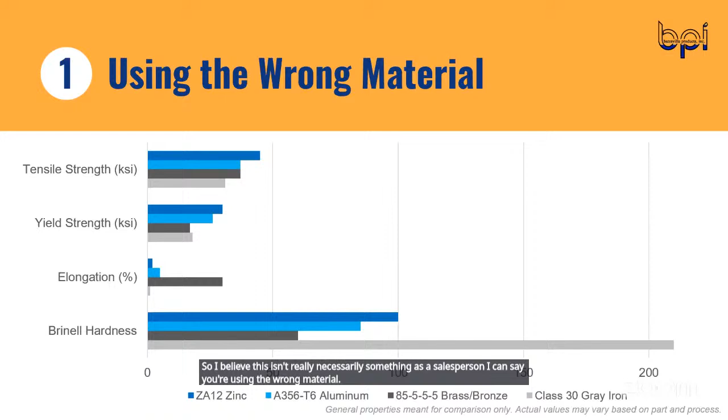Using the wrong material. So what does that mean to you, Rachel? What do you come across and what do you see? I believe this isn't really something a salesperson can say, 'you're using the wrong material' — it's definitely an engineering side where you have to do your research on the product you're utilizing, understanding what's important about the metal and your end use, so you know what you're getting out of your product. Choosing the metal will also determine the process you're going to manufacture with.

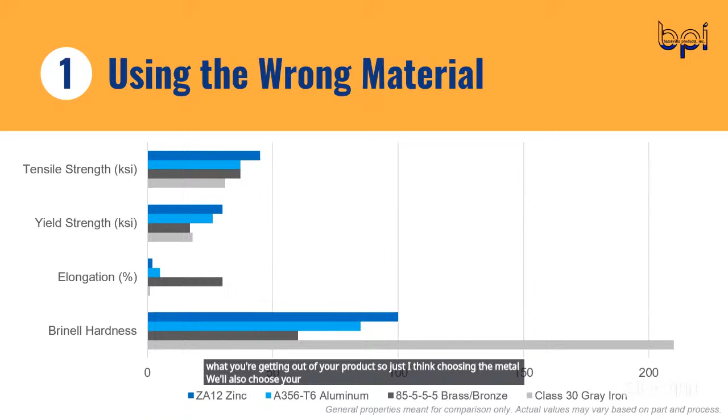So if you're looking for something lightweight but durable, aluminum is a great way to go. We cast A356, ZA12, and ZA5 at our facility. You can see those in blue on the screen, and you can see how they compare to some of the other main materials used in the industry.

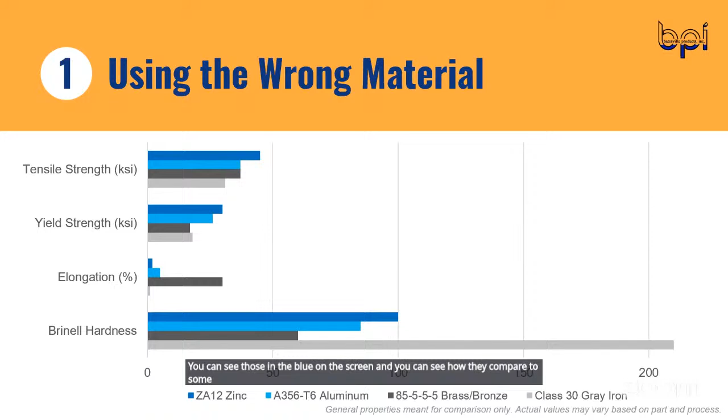Yeah, I think like you mentioned, we're not engineers, and by no means are we metallurgists, but obviously when you're designing a product, material is going to be important — whether it's the durability of the actual material, the flexibility on machining, the durability for the life of the product, whether you have corrosion areas, whether you need weight or need to remove weight. Really, a lot of factors there.

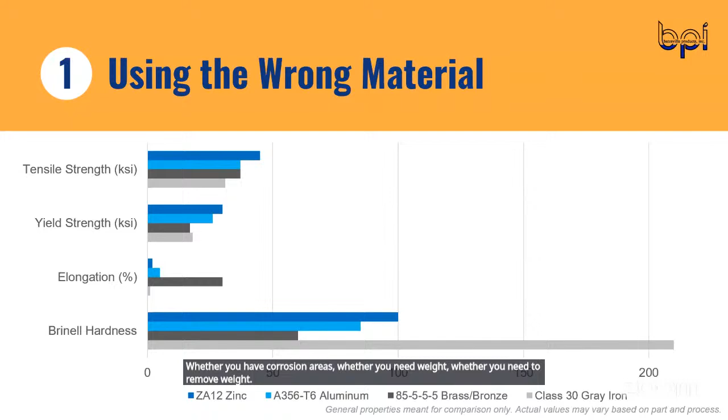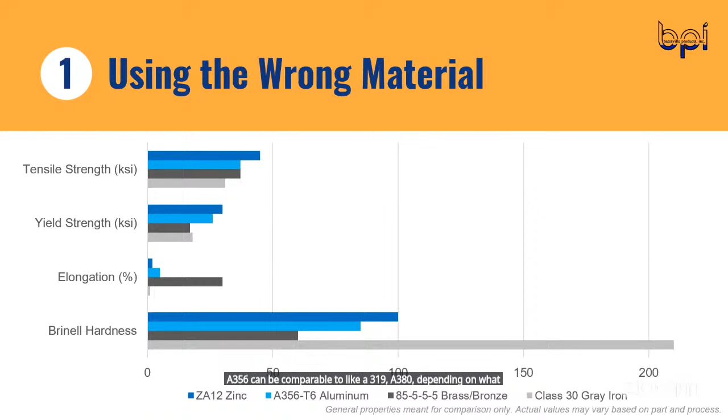It matters what type of process you're using, because A356 can be comparable to an A319 or A380, depending on what type of casting process you're using, and have similar properties. But you don't want to limit yourself and say you only need A380 when it could fit in those other categories, and it's not really removing the properties you'd still need as an end result of the casting.

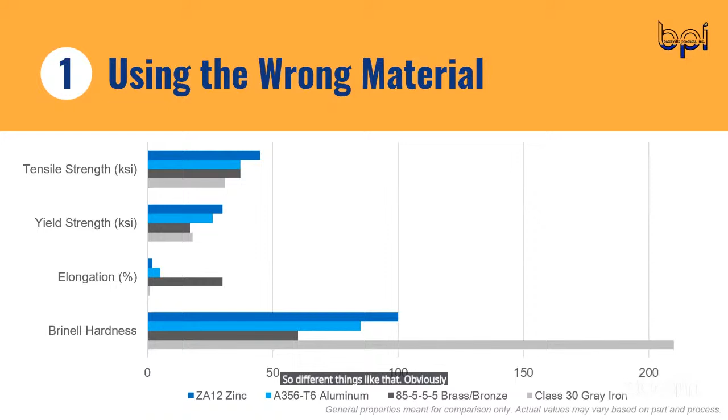Obviously, end applications as well. If you're going into food equipment, or underneath the bed of a truck, depending on where your product's going, the durability of the casting is very important.

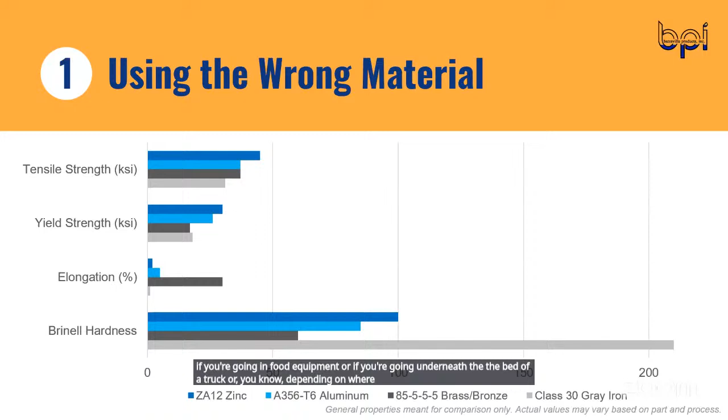Some of those are generic. A figure could be completely different for a volume die caster than for a permanent mold caster. So really making sure with your partner you're breaking it down and saying, what really makes sense here, is this fit for your process? A lot of times a good caster or good vendor really spells it out up front and helps you understand the right way to go.

If you're looking at quantities as a reason to choose one process over the other, a lot of times sand or investment are good entry level tooling costs for getting into castings. The only thing you have to consider when you pick those processes is what your end production process is going to look like - is it going to be die cast or permanent mold? There are different tolerances you'll have to consider when getting started that you may have to adjust when you switch processes. If you're doing investment casting, it's a little easier to switch to die casting because it's got the closer tolerances you need, whereas sand might be a little more conducive to switching to permanent mold.

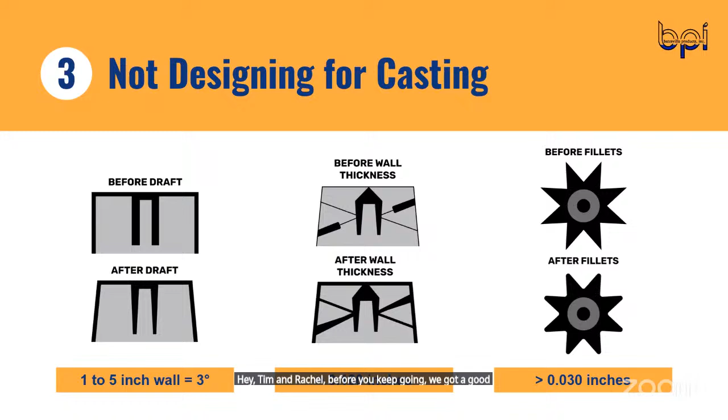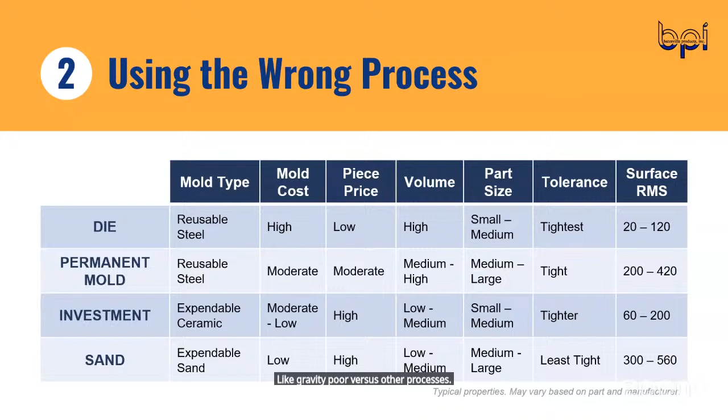Rachel, before you keep going, we got a good question here from Michael. He says, how much does the specific casting process affect the material properties, like gravity pour versus other processes? I know you touched on this a little bit, but can you go a little deeper into that? Yeah, absolutely.

It ultimately depends on what your metal is, right? So if we're using A356, that's a metal that can be used in both sand and permanent mold. It's comparable to A380 in die casting. They have similar properties. There are some slight differences, but for the most part, it's not really changing the mechanical properties too much to the positive or negative on either one. The A380 is very similar. If that individual, I didn't catch the name there, but if we can reach out specifically and send a high level material type cert to explain that a little bit better. For the most part, mechanical properties don't differ depending on process.

I would say that the real difference in process would be the level of gas that you're going to see in your part, or porosity, however you want to word it, is kind of where you're going to see the difference when it comes to the metal through the processes.

At a high level, die casting you're forcing metal in, permanent mold you're using gravity fed. Investment, you get kind of best of both worlds. You're getting that sleek mold, but you're still using a little bit of the gravity, and you're getting the sleek walls and tight tolerances that you can get from die casting. And then sand, there's a V process in sand that allows you to do some more of the vacuum or the pressure. But sand specifically is not a gravity tilt, but more of a gravity flow type process as well.

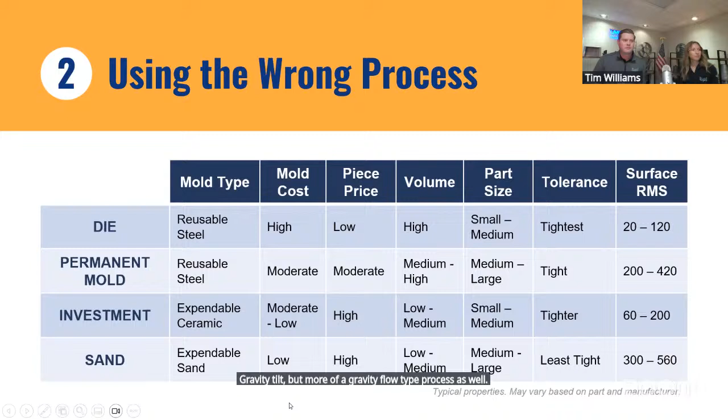So jumping forward, to not designing for casting. Some of the biggest things we see is just making sure that you understand the process that you're casting in. For example, die casting and investment casting, draft requirements are much more lenient than they are for permanent mold and sand casting. That's just due to the size and nature of the part. So you're going to have less draft to begin with, and the pressure of the part means you're going to be ejecting it out much differently, so you're not going to need as much draft to pull the part out of the specific mold.

That's a good one. Think of just cutting a cube, right? You cut a cube and you have your vertical walls and horizontal base and top. Think of trying to pull that cube, it's almost like your little play set as a kid. You're trying to put that cube in that cube hole. Try to pull that out if it's as tight as possible, you're trying to get that out of there, it's got that suction, it's hard, it's going to rip it. If it's got paint on it, it's going to pull the paint off. So that's an easy way to think of the draft side of things. If you've got metal on metal, you're trying to get this metal out of the mold, so really, no matter what process you're doing, you're going to need some kind of draft.

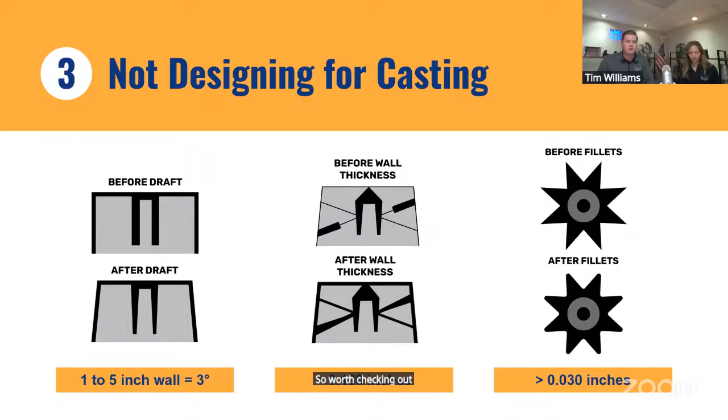I'd say in general, we talked about some of the different types of casting processes in that previous slide. There's different benefits, different types of wall thicknesses, different types of drafts, different types of expectations from fillets that are required. If there are specific questions, we'd be happy to answer them. We do have a really good guide online that gives a high level of information on the different types of processes and where you start in your design process and design expectations for your end needs. So worth checking out, but always open to sharing that with the group if requested.

This is a cool one. And I would say from my experience, being in the industry for a little over 12 years now, you don't see this all the time, but we do it all the time.

So really what we're trying to do here, and what you see on the screen, is an example of a simulation. We're trying to solve out issues that are seen digitally before we cast a product. The reason being, if you remember back to where we talked about the different types of processes and expenses from a tool perspective, we want to cut a good tool and design a good tool before we even start casting. The reason is you can't make a good casting further down the line in your machine shop or at the coating department - you have to do it at the casting operation.

So going through this process, there's a lot of different things a simulation can tell you. You can look at it both from a casting perspective - the gating and the risers and everything - and also from the mold perspective. It really helps you design out a successful process and product, and how you're going to do it, prior to even cutting or attempting to sample the part once getting the molds in house.

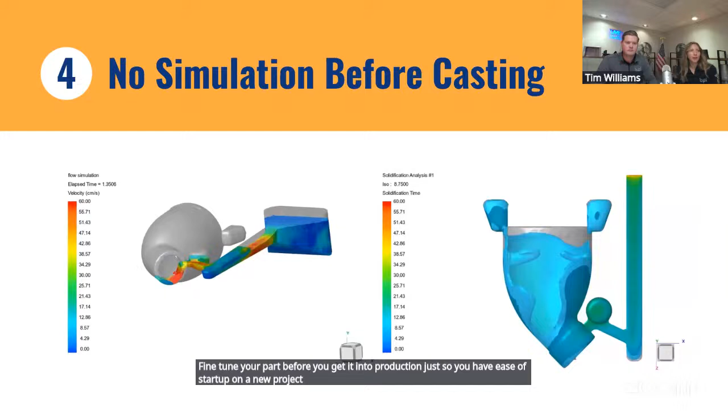I would say this is actually becoming an industry standard amongst other industries as well in manufacturing, not just metal casting. It's a practice a lot of, even plastic injection molding, people are using this method. It's a really good way to fine tune your part before you get it into production, so you have ease of startup on a new project, and also so you can see the potential risks you're going into with the process you have.

From my perspective, I think they're cool. They give you essentially a real life simulation of what it's going to end up looking like. This really helps our engineers go through the process of, okay, that left one there, you see some red area - how do we solve out where that may be trapping off metal or not staying hot or cold enough? How do they solve it? And I think on that one, it's full.

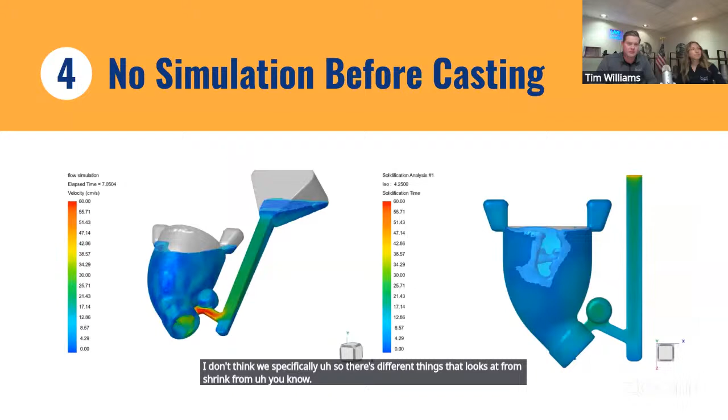Let's see, I don't think we specifically... So there's different things it looks at - shrink, hot areas, cold areas. If there's cutoffs like Rachel was mentioning earlier, if you're going to get shrink or porosity just from the casting method, that red area could bring to light an issue that can be solved before they even cut the mold.

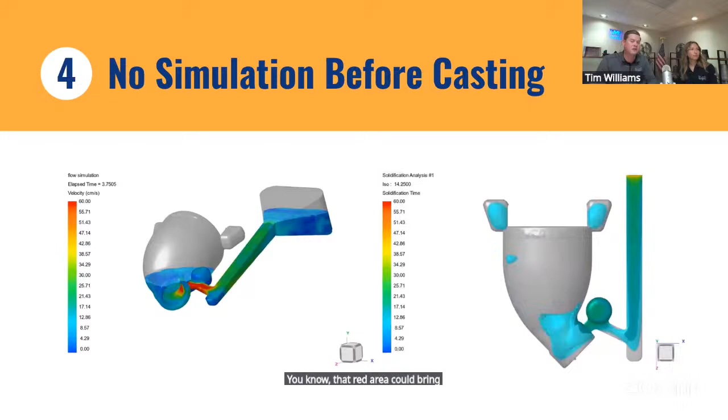So you touched on this earlier about surface finishes and talking about A, B, C finishes. Not clarifying your surface finishes can either increase the cost of your part and or potentially cause a supplier not to quote it, just due to high tolerances that aren't necessary.

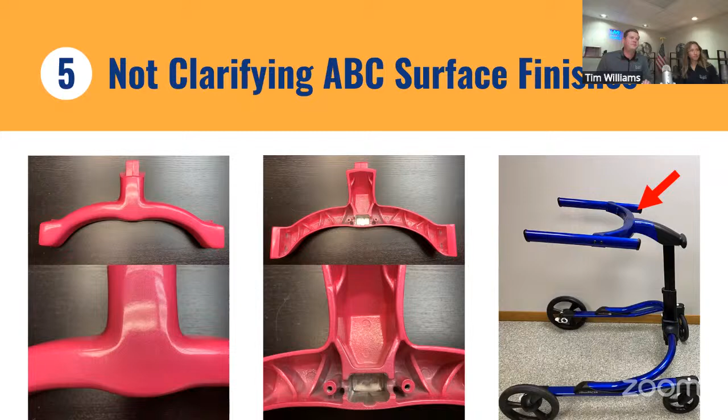Similar to the surface finish area, there are other processes or operations that could be looked at to add or remove some of the previous stuff we talked about, like fillets, or if you need a 3 to 5 degree draft but can't live with that in your end application, do we machine it? Does it need hollow cavities? Does it need added or removed strength? There are a lot of different applications, and again, really understanding the end goal of where that product goes.

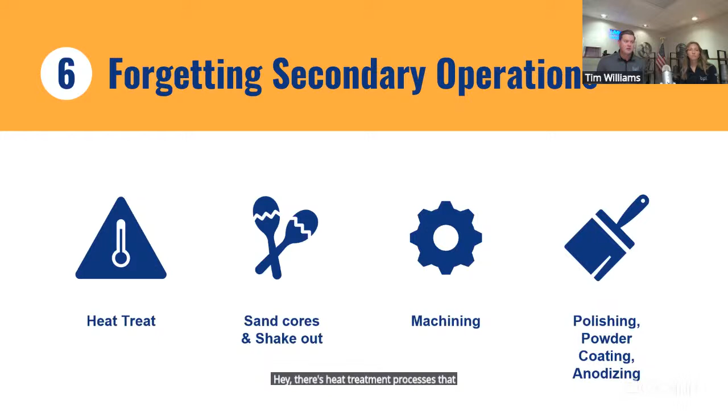And then, the question earlier about the different material types - there are heat treatment processes that can help from a strength and mechanical property perspective, but there are other opportunities here as well.

And there's sand core and shakeout that we listed here. Those are some things your foundry, if you're coming to them with the product and say, 'cast this complete for me,' they'll make sure a sand core is needed and that the removal of it is needed as well. So that's one thing your foundry should be telling you if it's going to be a requirement or not.

And then machining too, if you've got a complex casting that can't be fully completed with the way it's designed, your foundry should be able to say, hey, we're going to need some secondary machining to get to this end product. And then they'll ask you if that's something you want to quote or not, or if that's something you're willing to do yourself.

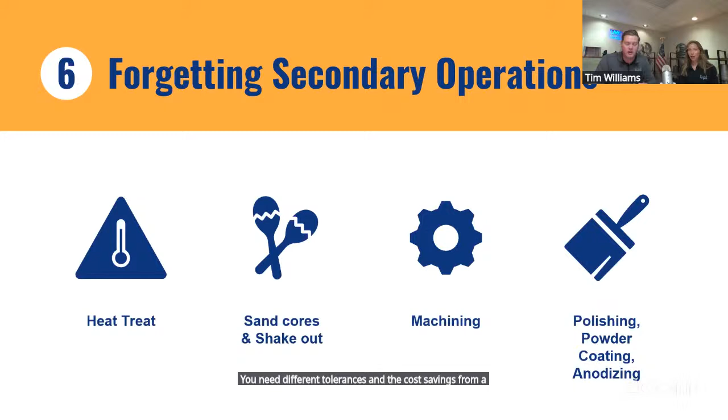Yeah, and again, the machining world has some limitations as well. But obviously, the goal from casting, in die casting, permanent mold, and sand casting really, is that it doesn't make sense to machine it out of stock anymore once your quantities get too high or you need different tolerances. The cost savings from a casting versus a machined component - really what you're trying to do is get a near net shape coming off the casting process, so your machining is minimal but targets the critical areas of need.

As Rachel mentioned, sand cores are kind of unique for the permanent mold process. They're used in different processes as well, but essentially it's to hollow out cavities that you can't do from a steel core or steel mold. So it's more of a specific process or specific need, but it is an opportunity.

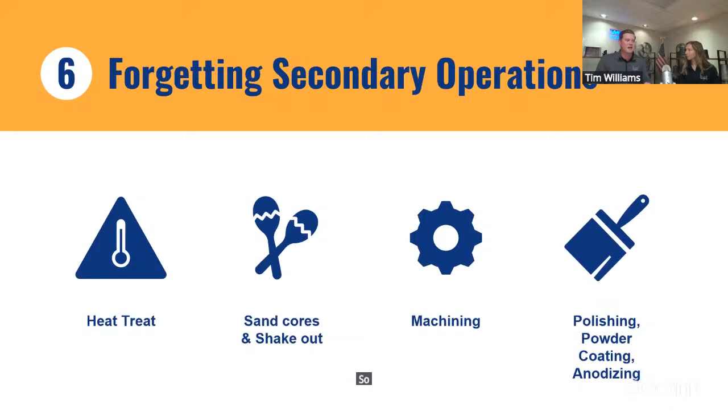And then, again, if you're doing kind of an as-cast surface finish, but then you put a textured application of the coating on it, that may eliminate a lot of the polishing that's needed in between and really get you to an end product there. So again, understanding the design and then the end in mind of where that product goes and how you want it to look.

So I think this is the key. Yep, key one, absolutely. So I think throughout the entire process, communicating as much as possible from the start is essential. There's reasons you reach out to vendor X, Y, Z, right? So making sure those vendors understand, hey, this is a new product, or this is an existing product, we have these issues. If it's existing, we're running into these issues - even if it's a new product.

Because casting houses and facilities will have expertise to help you down the path you need to go. But they can't help you if they don't know what they don't know. Yeah, it's definitely one - sometimes I think even foundries need to start asking the right questions too and digging to understand, because if someone's coming to them and they're not too familiar with casting, they're not going to know what expectations to communicate. So in turn, it's also on us, the foundry experts, to be inquisitive and ask the right questions to understand, is this product the right fit for this type of process?

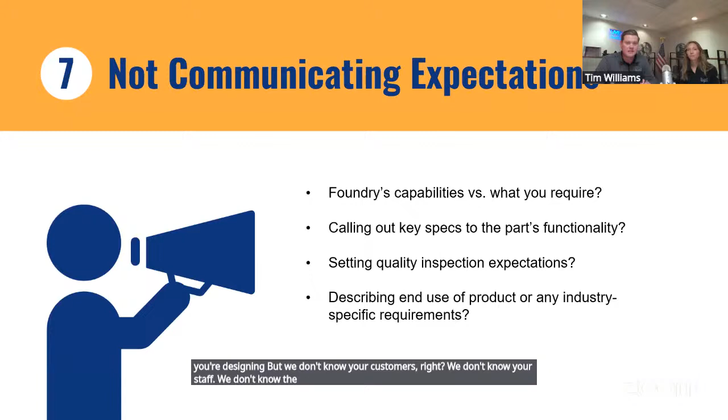Absolutely, because I think that cross communication is on that first line there. We know our capabilities very well, we know castings very well. We don't know your end product design really well. We look at the drawings, the models, the prints. We understand at a high level where you're going with it, what you're designing. But we don't know your customers, we don't know your staff, we don't know the capabilities you have in house. So really, that cross communication from both sides, being honest with one another, is key to understanding how we can help you get to your end result.

Some of that comes with specifications, and some of that comes with the end application - where you're putting it. Oftentimes depending on the other administrative industries you deal with, FDA or anything from that perspective, there are requirements you may not need on your product, but you need because you're involved in that industry. So really understanding - hey, let's not overkill anything, but let's do things right.

So the last one here is pretty hot topic right now with the new administration. A lot going on internationally as well, but avoiding domestic manufacturing is kind of a hot topic right now. Yeah, this was kind of an interesting one too, because recently we had a conversation with a customer of ours who had dealt with overseas manufacturing.

One of the things you forget is that the minute something goes wrong, you're all of a sudden scrambling to figure out how to get good parts in, and potentially having to air freight some very heavy castings over if you receive a truckload or shipment of bad castings. Then you have to scramble to get new ones and pay essentially for all of that scrap plus air freight.